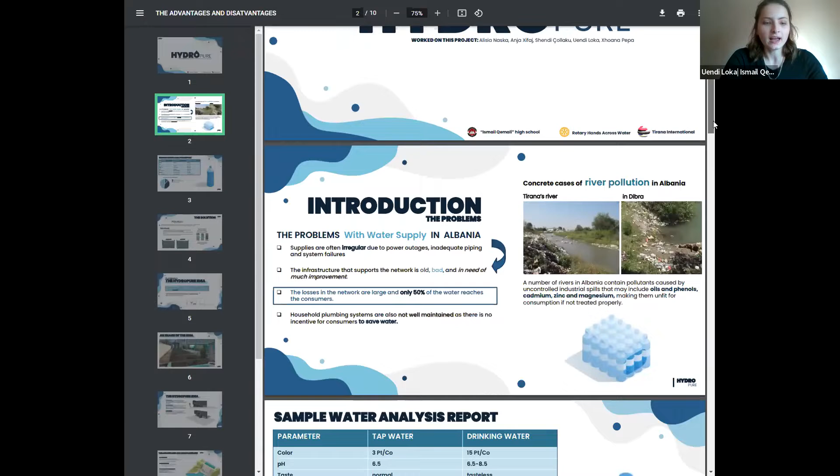Firstly, we did some investigation about water resources here in Albania, and we came to the conclusion that there are a number of rivers which contain harmful substances and even pollutants due to industrial spills. As for this third slide, we have included a table comparing the parameters of tap water and drinking water that will help us further into the process.

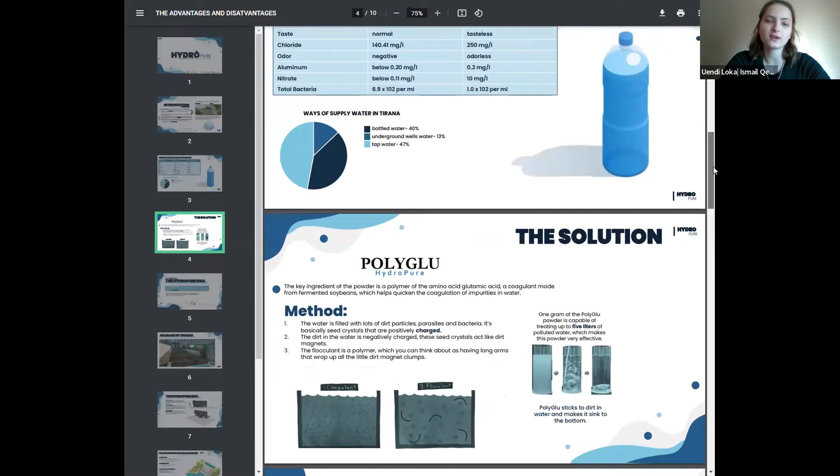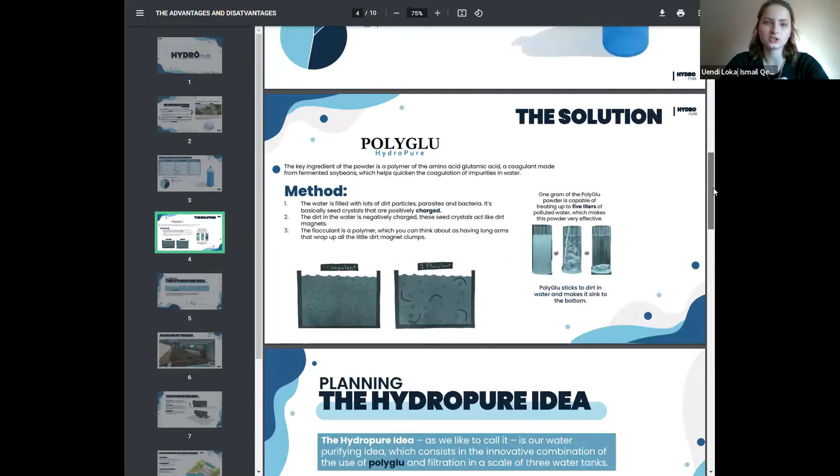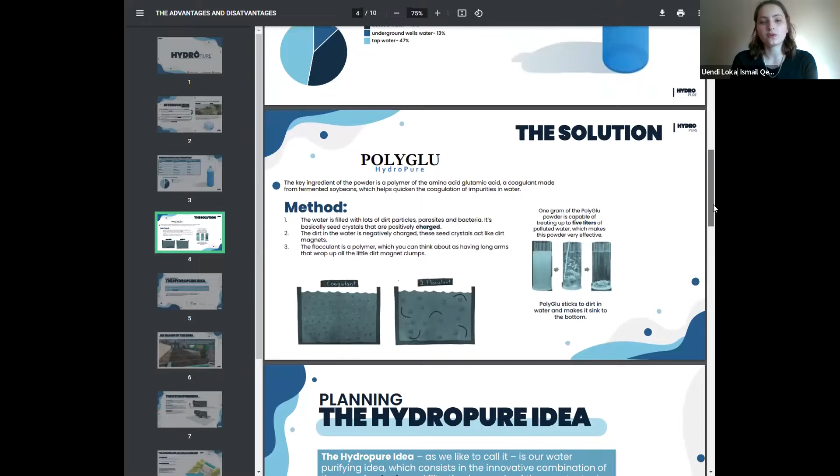The key ingredient of our idea is PolyGlu, a really strong coagulant which helps fasten the coagulation process of impurities in water, and you get PolyGlu from fermented soybeans. These soybeans are positively charged, however, the dirt in the water is negatively charged, and we can think of PolyGlu as a really strong coagulant and a polymer which has strong arms, and it traps all these positive and negative ions, and they sink to the bottom. So with PolyGlu, you can treat up to 5 liters of polluted water.

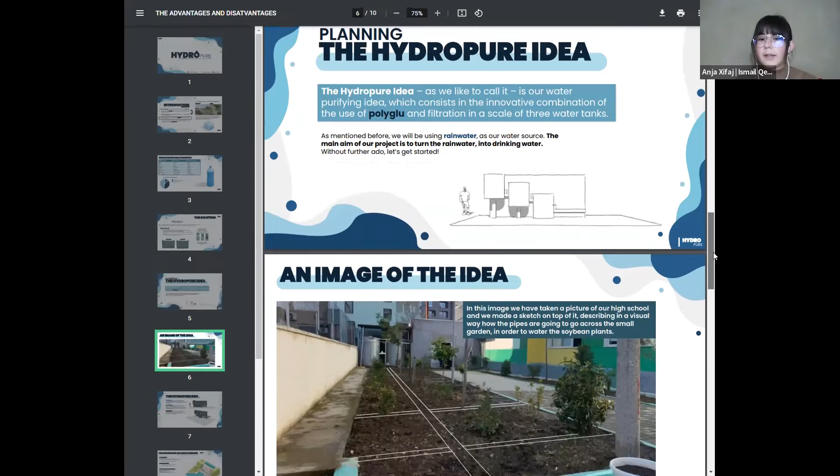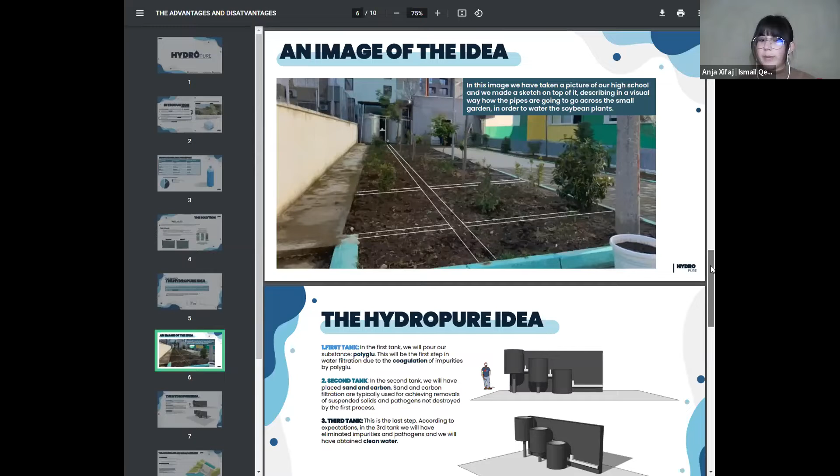Further into planning the HydroPure idea, I will be describing the structure more thoroughly. Firstly, as you can see, there is a small sketch of our idea, and we've also included an image of our actual high school. This is our backyard where we are planning to improvise a small garden where we'll be planting soybeans, so we don't have to just buy soybeans. We wanted to grow them ourselves. So this is a more concrete project.

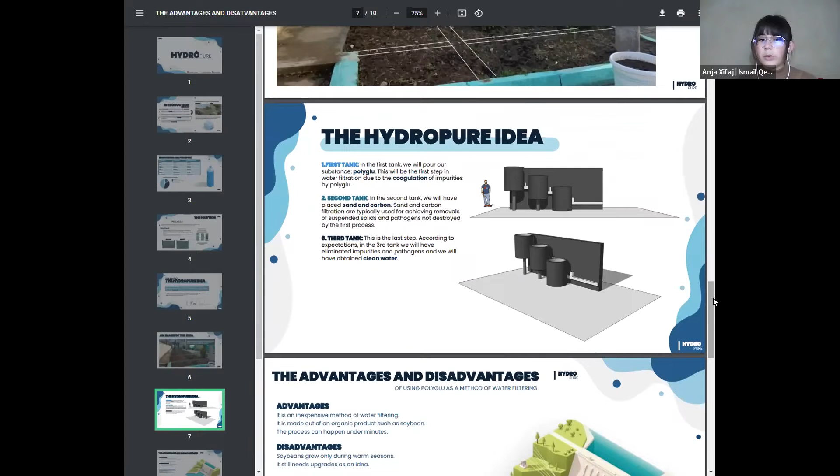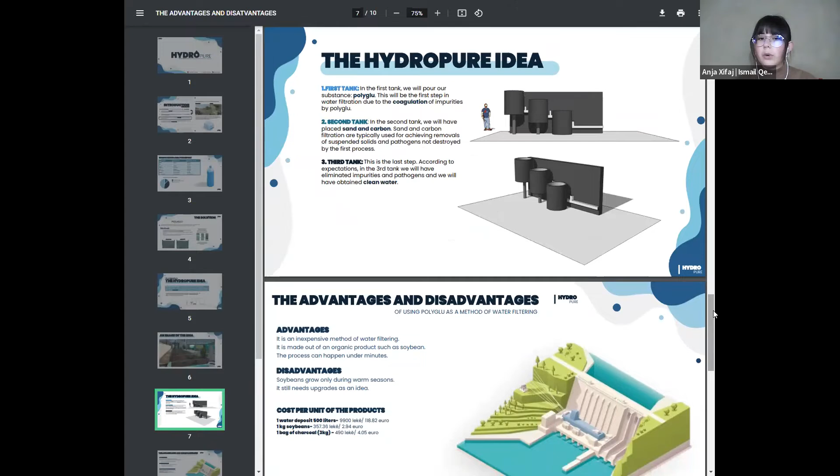As for the HydroPure idea and the tanks, in the first tank, we will have PolyGlu that will provide us chemical and physical purification. But we didn't want to stop there, and an important part of our project is also biological treatment, which will be provided by sand and carbon filtration in the second tank. As for the third tank, according to our expectations, here we will have clean water and drinking water.

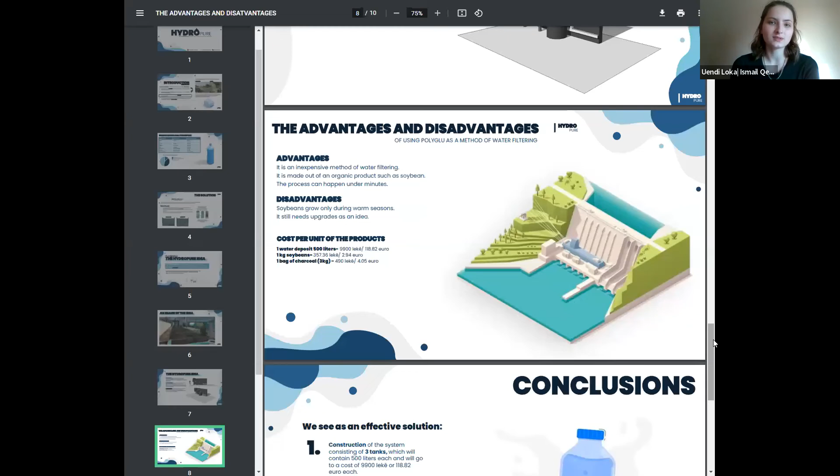So we have talked about the advantages and disadvantages of this idea. Some of the advantages are, it's not a really expensive method because we want to lower the cost by creating a small garden, and there we will produce soybeans and then ferment them. And with 1 kilogram of soybeans, which is approximately €3, you can produce a lot of PolyGlu, and you can treat approximately 4,000 liters of polluted water.

As for the conclusions, here we have listed 3 of our main solutions and conclusions of this project. Firstly, the construction, which will be with 3 tanks; the use of PolyGlu, our main substance that we're willing to put to work, which will bring us the purifying of rainwater into drinking water. And we've also included cost reduction in our budget. As I mentioned, we want to plant soybeans ourselves so we can reduce the budget. And we'll also be using 3 of our school deposits.

Thank you. This was our idea, and I hope we've been as clear as possible in explaining it.